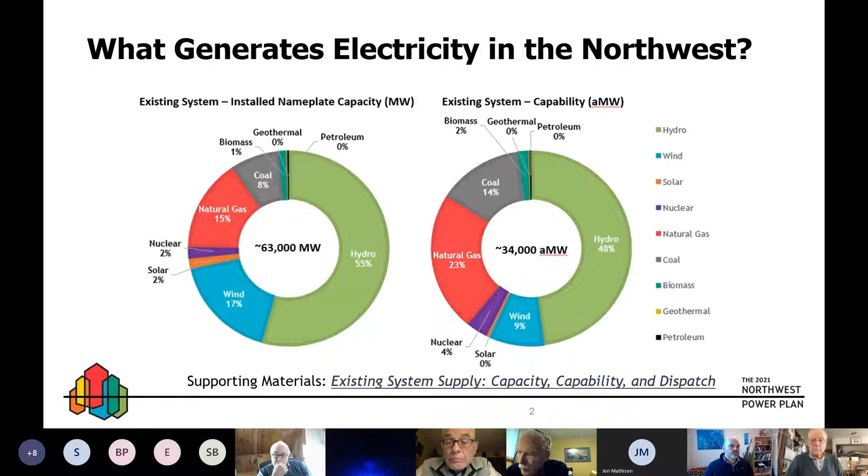So emissions from the Pacific Northwest region have bounced around quite a bit, and this was one of our challenges when it came to the Clean Power Plan in the past. One of the things that people need to understand about our region when it comes to the electric sector is that emissions very much are impacted by the hydroelectric generation.

And so you can see, generally, I'm not a big fan of using double axes, but this is one of those cases where it's nice to be able to point out two things that are very much related. The actual emissions are on the left axis of the system, and you can see how those have gone up and down through time. And then the hydro generation is the green dashed line, and you can see kind of how it impacts the thermal system and other parts of our system as you see the generation come out. So the amount of emissions in our system heavily depends upon the amount of generation we get out of the hydro system, and that changes from one year to the next.

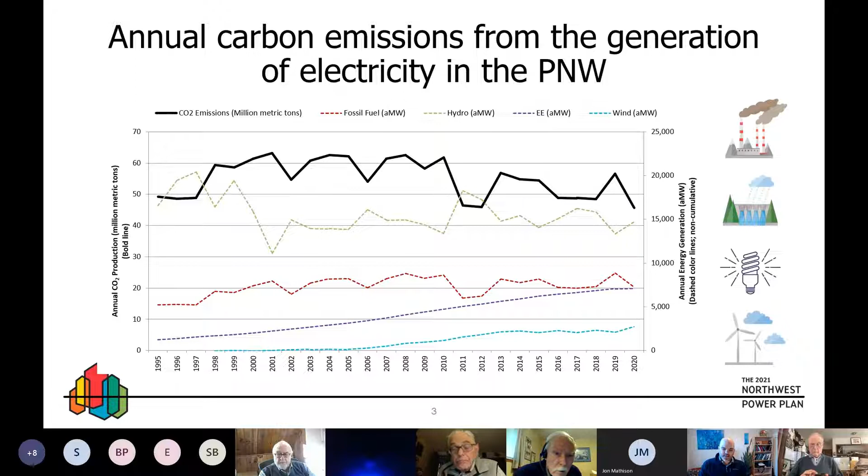So the other kind of big thing going on right now is that a lot of utilities are putting out plans where they are going to build a large number of resources. And so this was our view of just the Pacific Northwest utilities, only utilities within our region. We did a survey looking through the different integrated resource plans that they had and said, if you added up what all the utilities are saying they're going to build, what does it look like is coming onto our system? And you can see that predominantly wind and solar are going to be the main resources that utilities are planning on going forward.

And it's really minimal in terms of the amount of natural gas. And probably the natural gas here, I would imagine, is mostly within the IRP of NorthWestern in Montana. It's been a very unlikely resource to be added to our system in most of the rest of our region for sure, and actually the rest of the West as well. And that's one of the big challenges that we see going forward, a real hesitance for anyone to add in new natural gas generating resources.

So our general strategy that we put out in the 2021 power plan, and we do this every 5 or 6 years, so we'll refresh again probably in 26, 27, is to see by 2027, in broad brush strokes, about 750 to 1,000 average megawatts of energy efficiency, about 3,500 megawatts of new renewable resources, and to the extent that it's obtainable, low cost, and frequently deployable demand response. For us, that generally means something like conservation voltage reductions. You're talking about electric utilities having computer controls on voltage regulation that allow them to be more precise in how they meet the regulation standards.

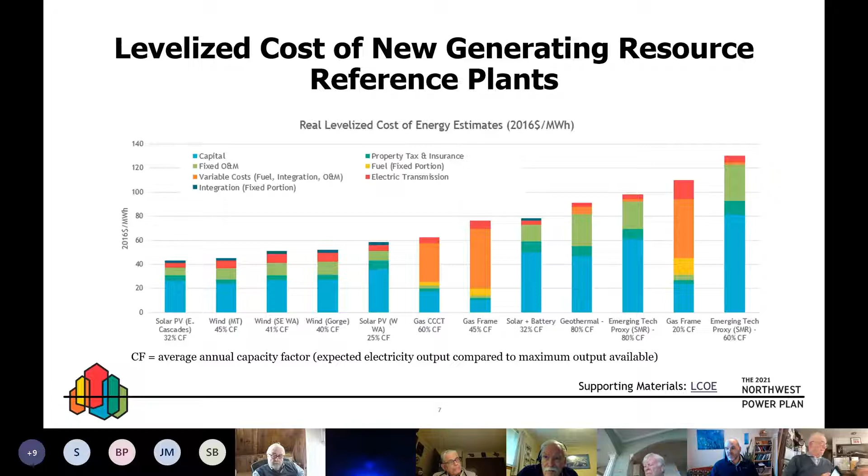You have something like Idaho in our region where you don't have any legislative demand for clean policies, but Idaho has basically three main investor-owned utilities in it. It has Idaho Power, Avista, and PacifiCorp, and all three utilities have said that they have goals to be clean by a certain date. And so when you take those into account for the Idaho service territory, you see that there's actually very aggressive goals within the state of Idaho to add clean energy into the system.

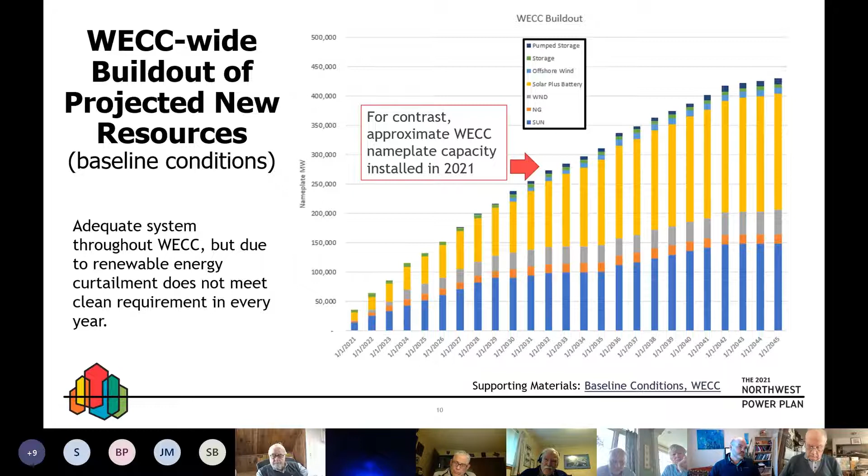So in our projection, one of the biggest challenges we saw is that curtailment gets kind of out of hand, and the cost of storage is really not quite at the point where it's really changing this dynamic. And so the model solutions want to overbuild renewables, and they want to curtail a bunch of the output of the renewables so that for adequacy purposes, when you need the power, you basically have overbuilt the system so that you have enough in those cases where you might not have the highest ramps on solar, or you might have a lull in the wind. Obviously, having a really large fleet is one way of making sure that you have some power coming out of those technologies.

And of course, solar with storage gives you some capability to move it, but really what we see is to meet these policies, the cheapest solution is just to overbuild the system, way overbuild the system with renewables, curtail an astonishing amount of energy, and then use that as the strategy for the least cost system that complies with all these policies. If you think curtailment of renewables sounds crazy and would not happen, all you have to do is go look at the California ISO website today.

They have been curtailing renewables for years to very, very large extents. They've been building a lot of storage. In fact, I think you can now see more than 1,000 megawatts of batteries on the California system, and they still have a massive amount of renewable curtailment on their system, and it has been growing year by year. We see this trend not only continuing in California, but actually really expanding to the entire West as these technologies take over.

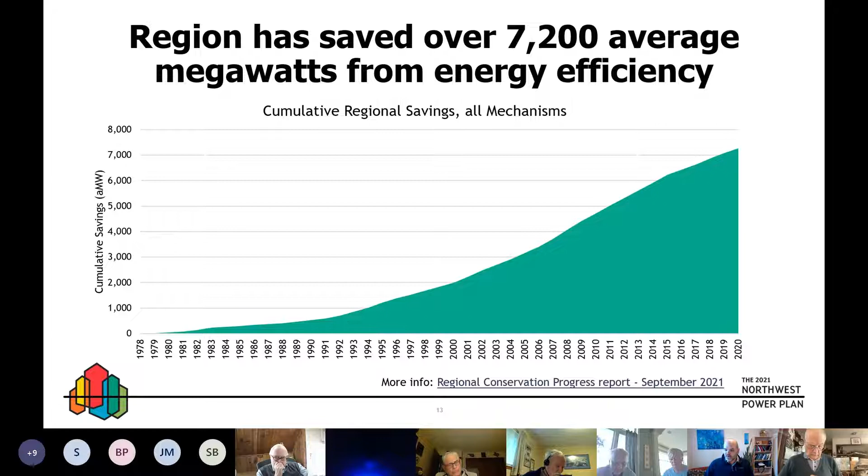If you think of the transformational nature of LED lighting and what that has done to the electric industry, that's just one thing. Flat screen TVs in our homes is another good example. Plenty of things on the commercial side too. Certainly heat pumps are the latest thing that people are looking at and pursuing for energy efficiency. So finding more effective ways to use less energy and accomplish the same work has always been a big part of how our region has kept the system adequate.

But some of that low-cost efficiency potential is really hard to find this time around. Overall, when we looked at the supply of energy efficiency, especially within our first 6-year timeframe, we not only have a lot of low-cost resources now that are really in competition on the renewable side with energy efficiency, we just have less of it out there. So almost 30% less available than what we had in our last power plan in this first 6-year period.

And that's just the supply. And then you have resources that have come down substantially in cost. Even the gas resources have come down substantially in cost, but the renewables for sure have created a lot of downward pressure on energy efficiency. It's hard for utilities to look at energy efficiency that costs $100 a megawatt hour when you're looking at solar power purchase agreements in the $35 a megawatt hour range. So that's the dynamic lately, and why we see downward pressure in this latest plan: less supply and more competition.

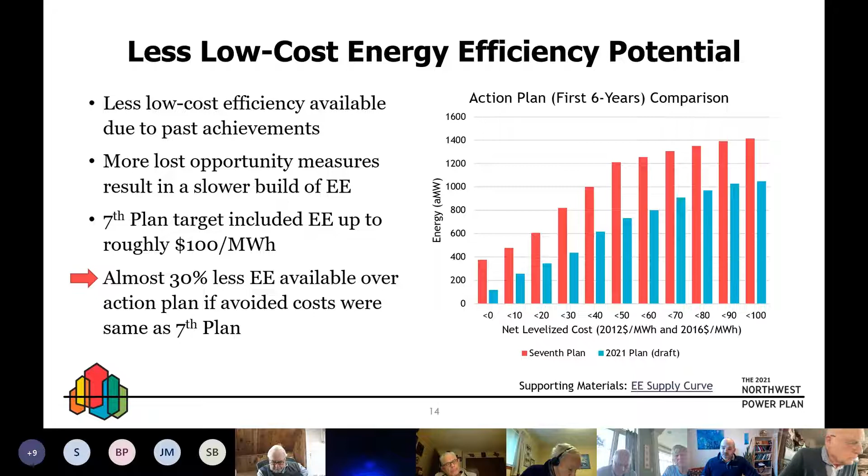So in this case, we are forecasting that by 2041 the region would have around 300,000 electric vehicles sold in 2041. So there's a rising fleet of electric vehicles being served by the electric grid. And this is a pretty aggressive forecast, we think. It's not one that people look at and say it's way too low, or that people who know the electric vehicle industry say could be a lot higher. So this is our baseline assumption.

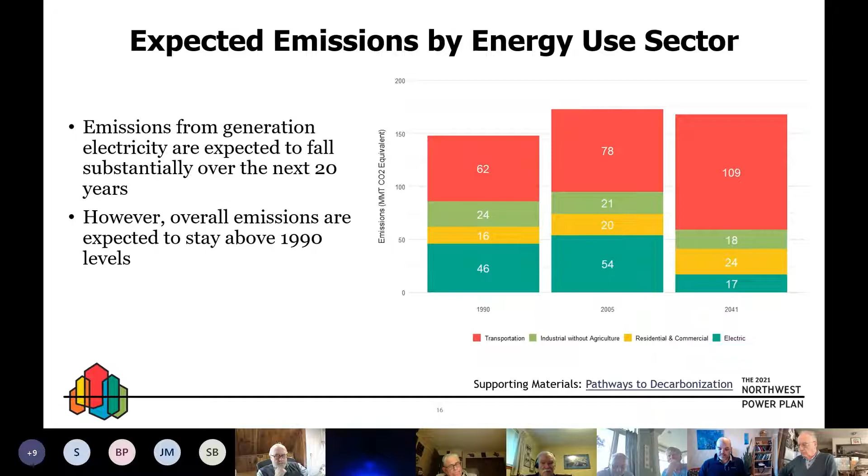So while it's great to see all these policies and all these trends and all these renewables coming in and really reducing the emissions in the electric sector, it's not enough to meet any of the policy goals that are really set forth in the different states. So we asked ourselves, what would it take to get closer to meeting those goals? And what would it mean for the electric sector if you were to go after meeting those sorts of goals?

And here you can see that it is a very substantial load increase. So while we're anticipating that load will grow in our sort of regional view, when you add in all the different potential ways that you would be looking at decarbonizing by moving end uses onto the electric grid from other fuels, you see a really rapid growth in electricity. And if you carry this out, frankly, that sort of exponential curve just continues going to 2050. It's a really aggressive future where load is going up to above that 35,000 average megawatts sort of level, which is not doubling the load, but it's a lot. It's a lot of new electric load on the system.

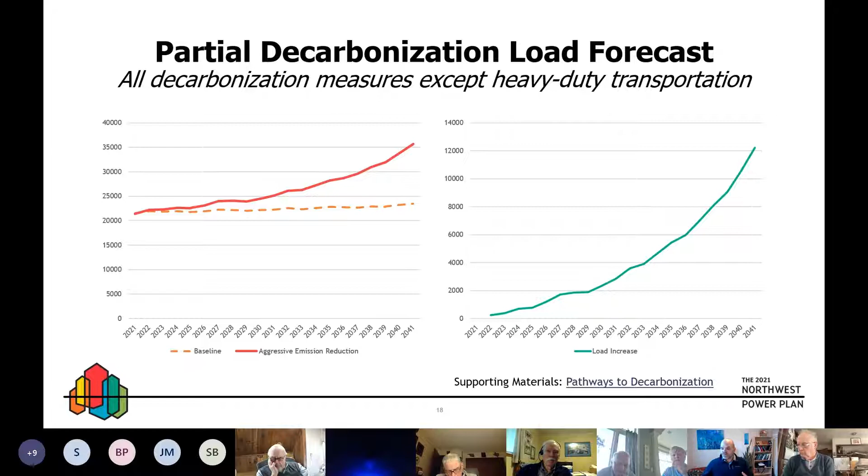So really policy, if it continues driving down this path, is going to keep pushing more and more onto the electric grid as you're seeing some of these other resources coming in and leaving. So you've got this sort of dynamic where a lot of resources are being retired, a lot of new renewable resources are being added. At the same time, you're really seeing an explosive growth in electric load because people are, through policies, trying to push more and more things out of fossil fuel into electric end use.

So while I gave you a general strategy for how much renewables we anticipated would be needed in that first kind of 6 years for our baseline and for the recommendation from the council, we did do some work here and we acknowledged that you see a lot more resources are needed if this is the policy direction that the region goes down. So we recommended 3,500 megawatts of renewables. But if you really were going to aggressively go after this and you let the models do the calculations, you'll see it's building closer to 15,000 megawatts of renewables in our region to meet this increased load. It's also getting more energy efficiency and more demand response to try to get all these resources to respond to load growth based on a lot of new electric end use coming onto the grid.

By 2041, those numbers get pretty substantial. Again, you see a lot more renewables, a number that seems really quite astonishing, 36,000 megawatts of renewables when that's really, I don't know, it's hard to compare to our current system. You're talking about a really massive expansion of the number of renewables within our region. A lot more energy efficiency and DR and some energy storage added in there.

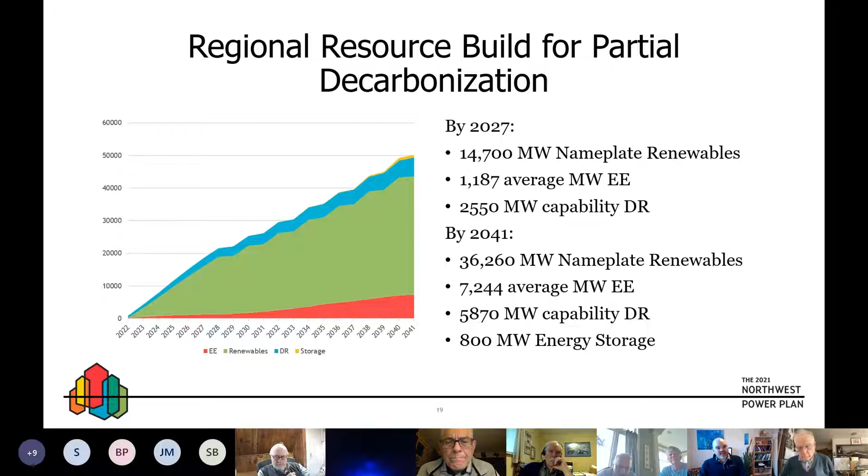Now, that is without dealing with heavy duty transportation. And the reason that we did it without heavy duty transportation is, frankly, our models are not set up for the type of transformational change that would be needed if you were going to completely electrify the transportation sector. So we needed something that could kind of give a sense of what it would take. And again, this is on a ramped sort of basis. So you're seeing the first onset of it, but really it keeps going incredibly aggressively if you go past 2041 in this example.

So we chose to use hydrogen. Heavy-duty vehicles, we looked at the heavy-duty vehicle miles traveled, and we used hydrogen production as kind of a proxy for how much energy would be needed. And really, we said by 2040, about 16% of the vehicle miles traveled by heavy-duty transportation would have to be served by hydrogen, and that created a need for around 4,500, almost 4,600 average megawatts of new electricity to basically, through electrolysis, convert water into hydrogen so that you would have enough hydrogen to drive the transportation sector.

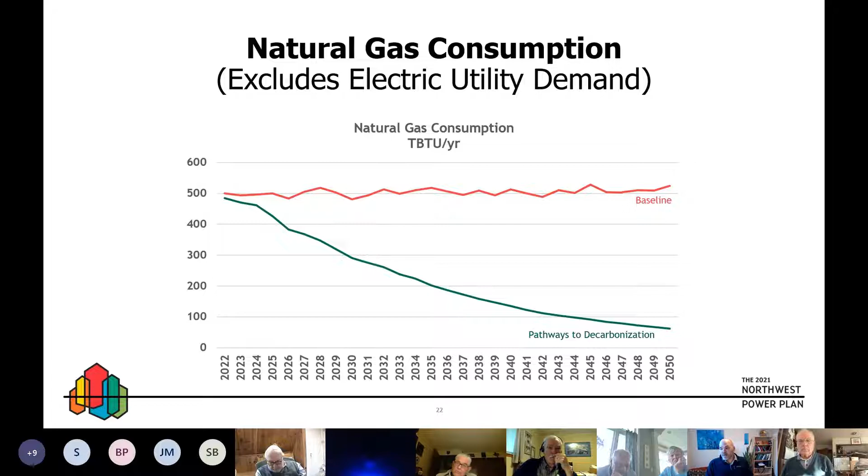On our baseline, we see natural gas use being very much static, bouncing up and down as you see different weather from one year to the next, but overall pretty static throughout the next 20 or 30 years. And if you want to aggressively decarbonize, something has to change about that.

So when we look at the total energy sector, not just electricity, but electricity, gasoline, diesel, natural gas end use, all those different energy sectors: in 1990, we saw around 148 million metric tons, cumulative. In 2005, it went up. In our baseline for 2041, we see that going to 169 or so. Again, hydro conditions and weather would impact that.

If you aggressively go after all this decarbonization, including those heavy duty vehicles that we felt like our models couldn't really get to, we could see that going down to 105 or so in 2041, on a path to being around 90.

However, and this is a proxy, I know Washington is looking for net neutral by 2050. Oregon has some different goals. We took this aggregate in the region, Oregon, Washington, Idaho, Montana together, and said let's just say you're shooting for an 80% reduction from 1990 levels. That's a target that's been floated around quite a bit. You would need to get to just under 30 million metric tons of CO2 emissions.

And with our partial pathways to decarbonization, including heavy duty transportation, you get nowhere near it. You get to about 90. But one of the things we do that a lot of the outfits you might have seen decarbonization reports from don't is we only look at today's technology. We don't anticipate future technology changing substantially. We look at some sensitivity on prices, but we don't work in new technologies that might come in and radically transform the industry.

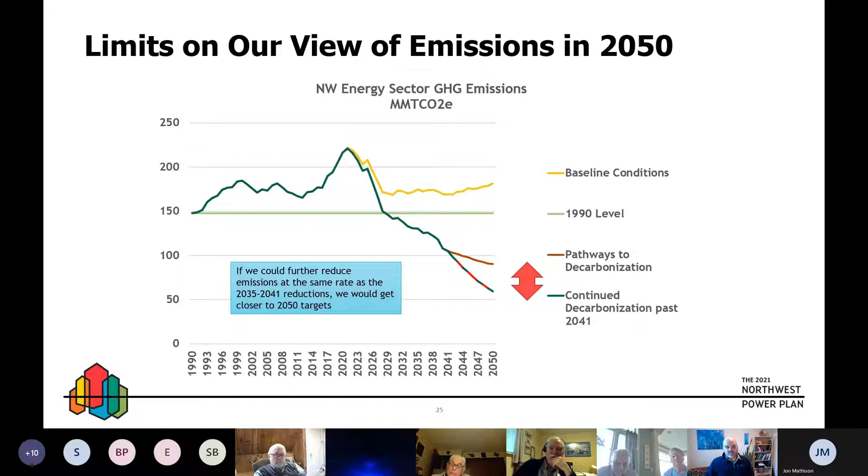And that's mostly why I put this in, just to note, technology has done a lot of things. The technology that we will have in 2040, it's very hard for me to anticipate. What we can tell you is with the current set of technologies, this is a very hard path to get to the targets that are out there today.

So that's hopefully a fairly good high-level synopsis. I've got some extra slides. If they come up in questions, you can get to the presentation and see those extra slides. But right now I'd be happy to answer any questions or go back over any of this.